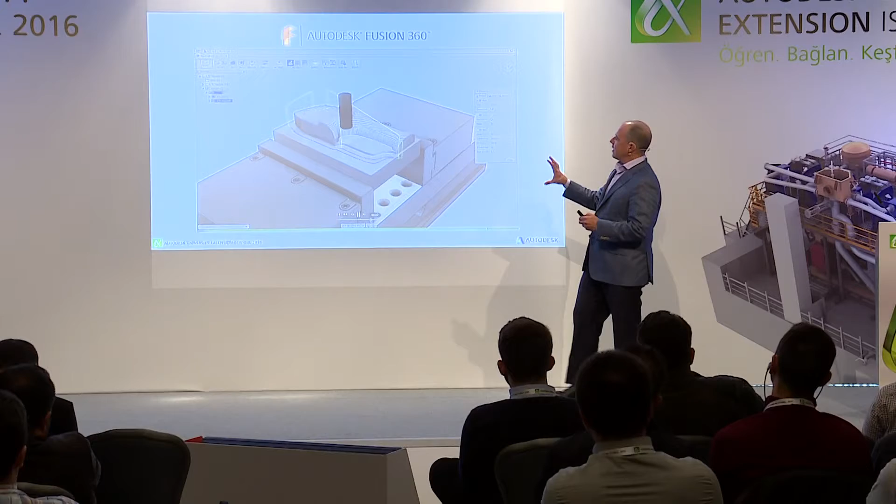So we have Fusion 360. Fusion 360 is our newer mechanical CAD tool. And it's not only a 3D modeling tool, but it's also a collaboration tool, as you can see here. It has very advanced direct modeling capabilities. It can also generate documentation, of course. But interestingly, it also has finite element analysis, and it also has the capability to generate CAM, the numerical control instructions. And it also has 3D printing capabilities.

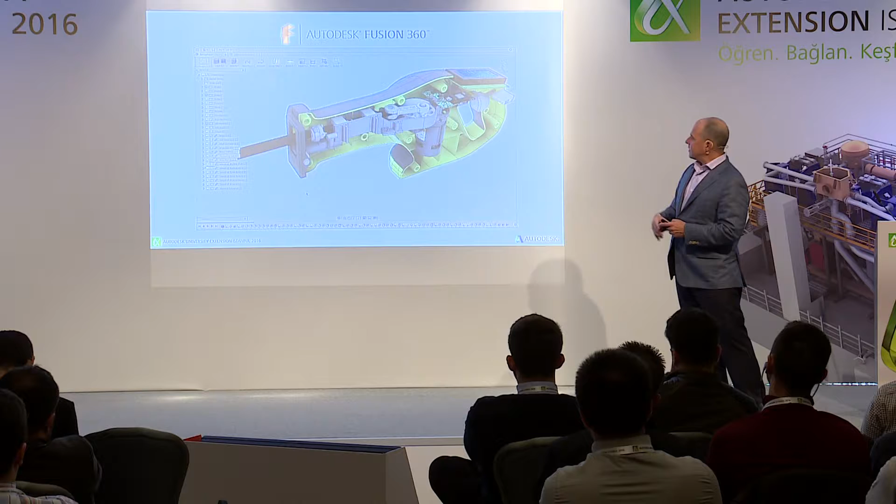So as you can see, it's not really just a CAD tool. It's a CAD tool, it's a computer-aided manufacturing tool, it's an analysis tool, and it's a collaboration tool. So we call it not just a mechanical CAD, but rather a product innovation platform.

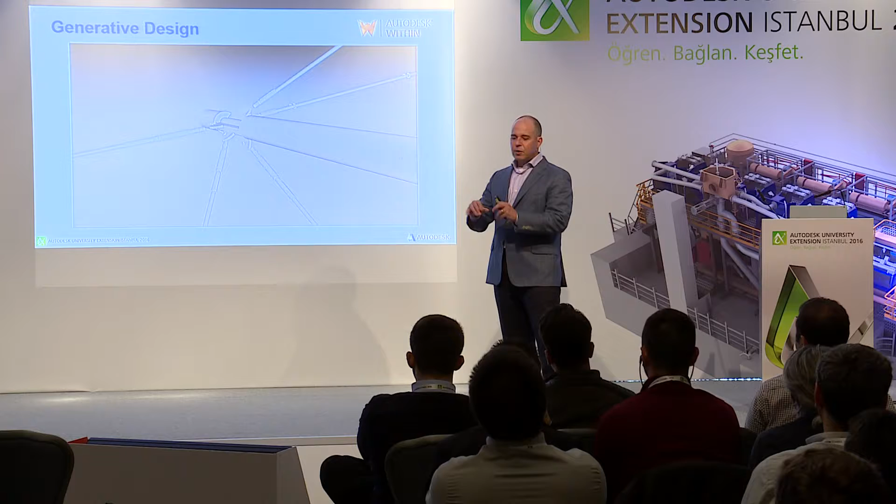The other interesting thing: this morning, both Callan and myself mentioned generative design several times. Well, we actually have a product today that does generative design. There are several types of generative design. This one is called lattice optimization. And, oops.

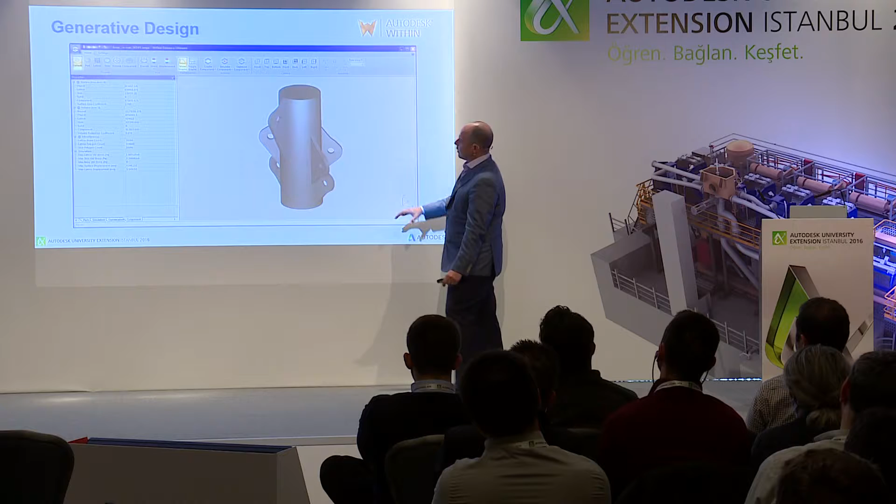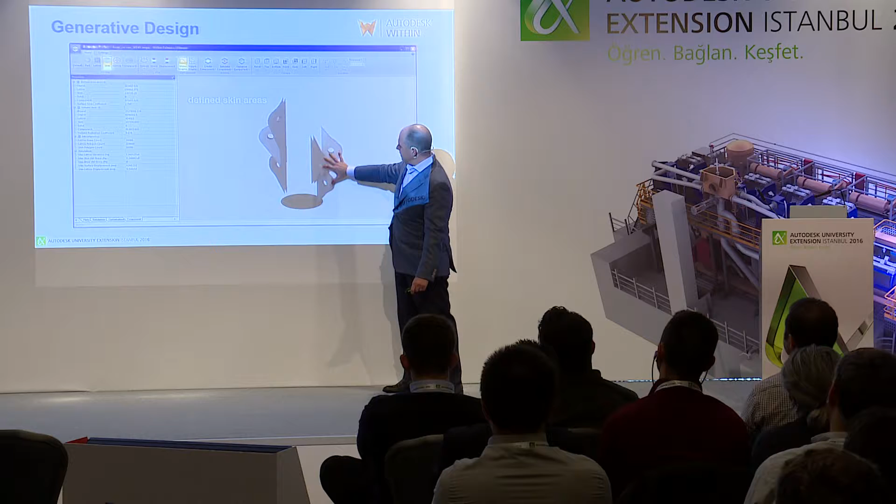And say, for example, that you want to optimize this joint here. This is the original joint, and you want to use generative design to optimize that particular part. So you bring it into the product that is called Autodesk Within. You define the geometrical connections and the boundary conditions.

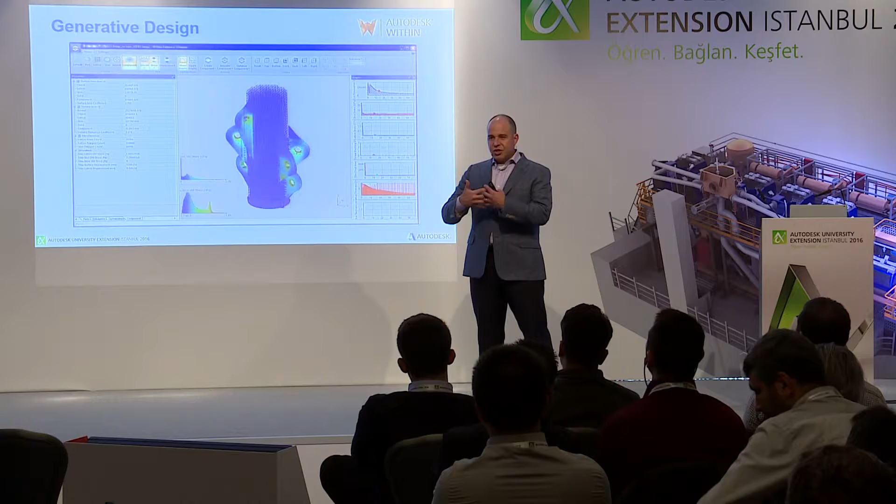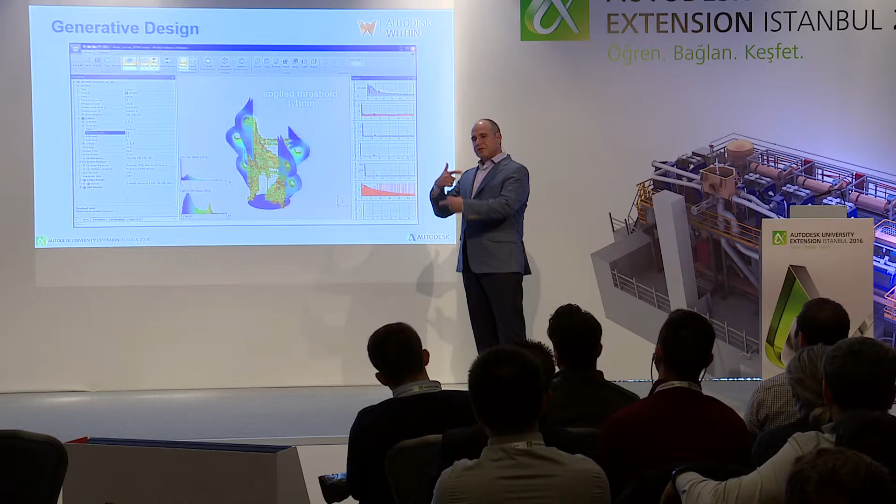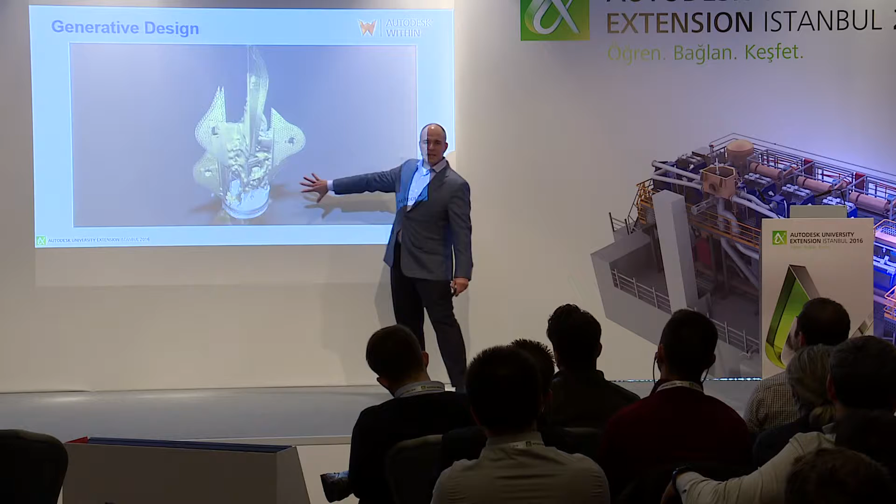And then Autodesk Within will actually change the shape. It will create these little lattices of product to have the least amount of product possible and still be strong enough to support the loads. So now it's running successive analysis and optimization, one after the other. And this is the final geometry of that same part. It applies a skin, and this particular part can be 3D printed.

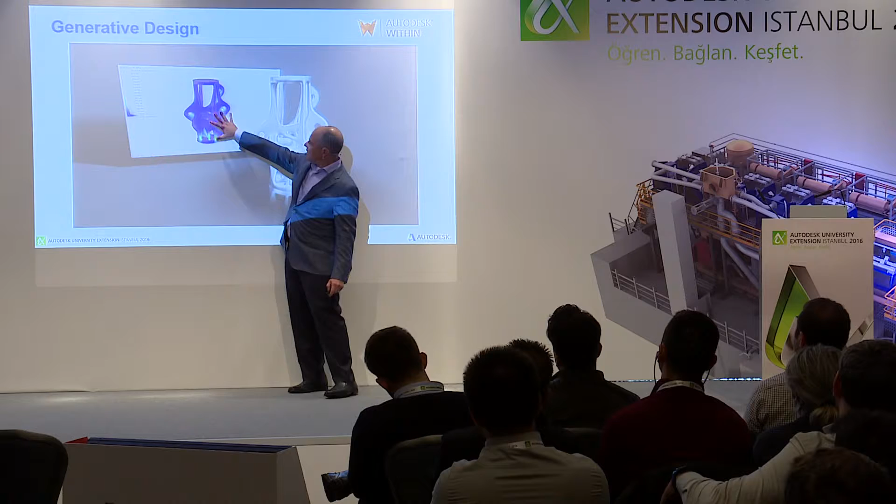And as you can see, the result is that the stresses here shown in blue are fairly consistent. You don't see red spots; it's fairly homogeneous, which means that the shape has been optimized in such a way that the stresses are uniform everywhere. And this shape is very organic and very interesting, and it's the lightest possible one that you can get. So that's using our product called Autodesk Within, our current generative design product.

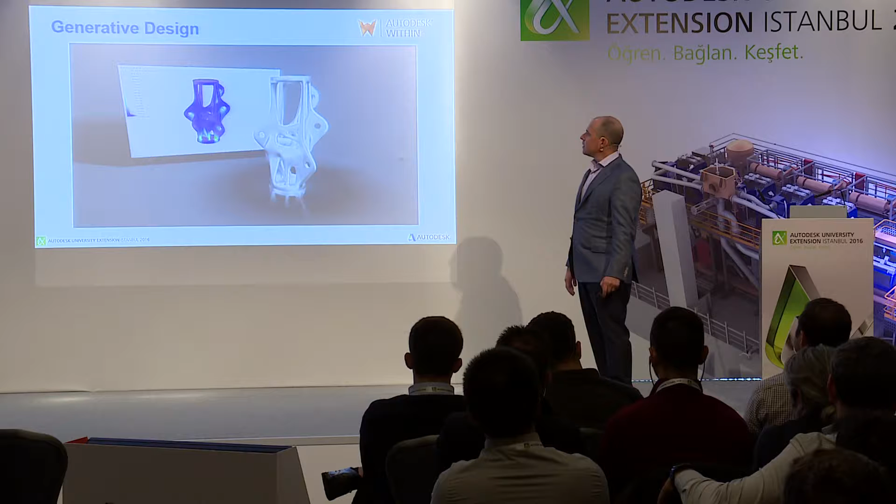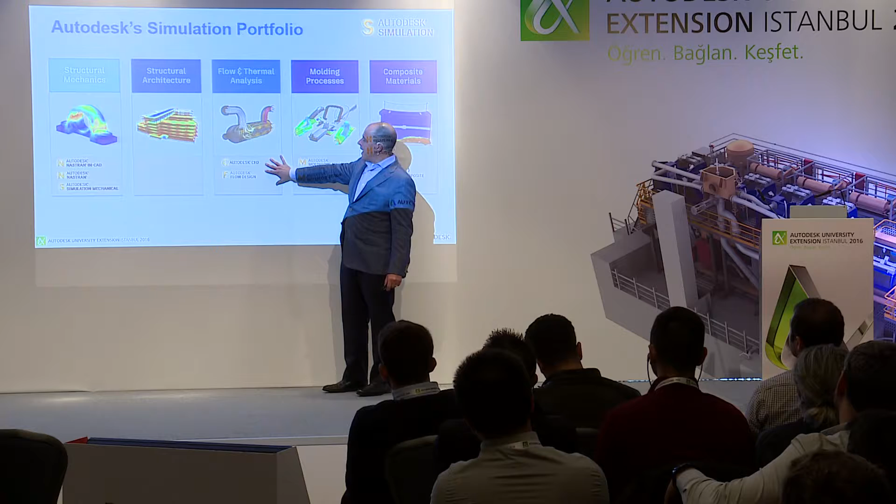Also, like I mentioned, over the years, we've been making acquisitions and development to really strengthen our simulation portfolio. So the result is that now we have a very broad simulation portfolio that includes capabilities to do structural finite element analysis, also for architecture and steel frames, computational fluid dynamics and flow design, and Moldflow, which is to analyze the injection molding fabrication.

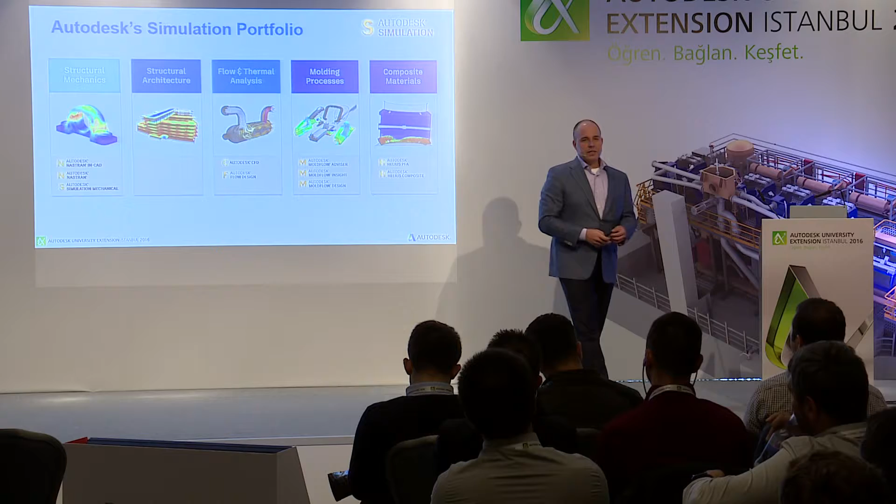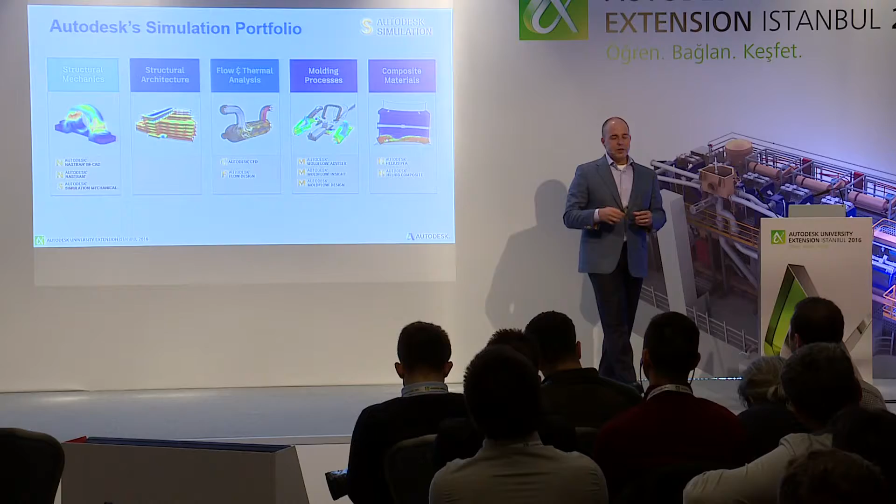And we are also very strong, probably the leaders in the market in composite materials, both the simulation and the actual fabrication of composites. So as you can see, that's a very broad and very strong simulation portfolio. And some of these tools can also be executed in the cloud, so you don't need to have a very powerful machine to run them.

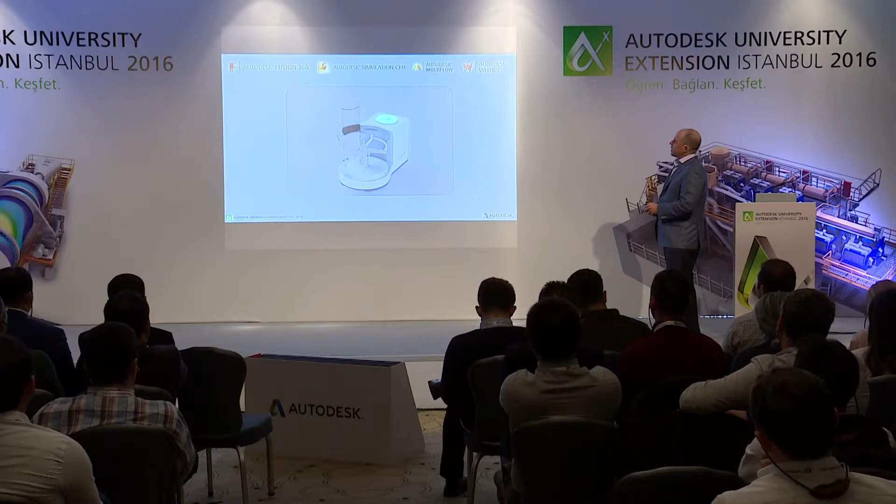So let me give you an example of the type of things that you can do today by combining a few of our products. This is Fusion 360 for the 3D modeling, simulation, computational fluid dynamics for the fluid flow, Moldflow for the injection molding, and Within for the generative design. So the purpose of this example is to design a mold for this part of the mixer. So this is the original mold. That's the original shape of the mold.

But as you can see, by analyzing it with Moldflow, the distribution of temperatures is very heterogeneous. So there are very hot spots and cold spots. So how can we redesign that particular mold to make it more efficient, both thermally and in the weight of the mold? So using Moldflow, we can analyze exactly the cooling behavior of the cooling channels and come up with a shape that takes advantage of the cooling.

And then by running Autodesk Within, we can generate a lattice that makes the geometry even more efficient. So this was the old design, and this is the new design. As you can see, it's much lighter, it's much smaller, and the result of this analysis is not only a 45% reduction in weight, but more importantly, a 10% reduction in cycle time. The cycle time is basically the time it takes to make each part, and that's very important because that increases the capacity of your injection molding operation.

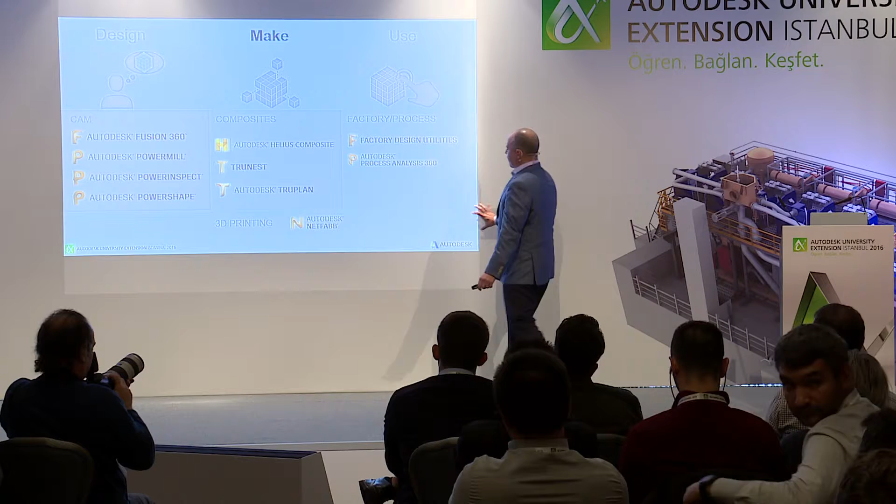A couple of years ago, we acquired a company called Delcam that brought a lot of the computer-aided manufacturing capabilities to Autodesk, and they have a product called PowerMill that now is part of our CAM products. We're also very strong in design and fabrication of composites, and we also have tools to design the factory in which these things are going to be manufactured. And probably the latest addition to our portfolio is Netfabb, which provides advanced 3D printing simulation capabilities. And I'll show you a video of Netfabb.

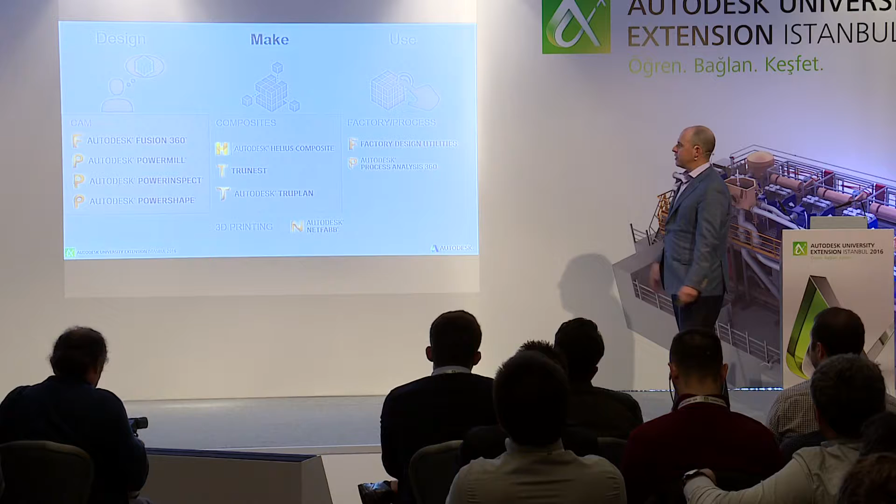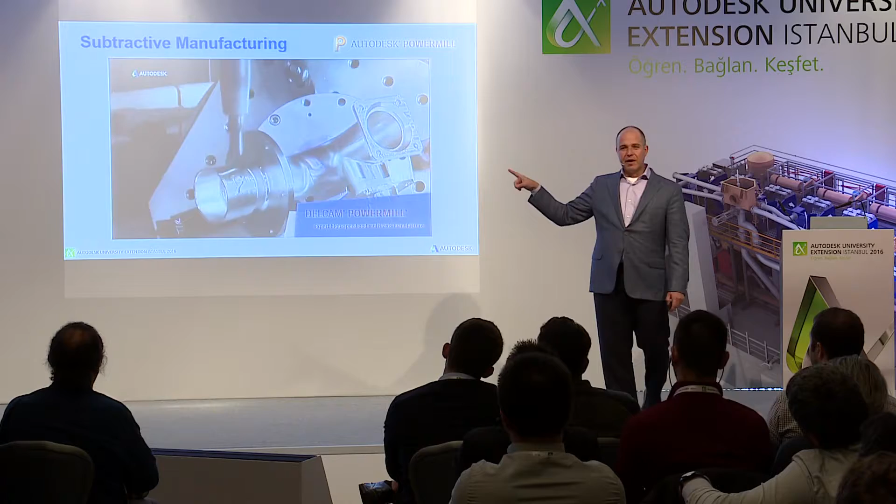So this is a little video of the type of stuff that you can do with PowerMill. With PowerMill, you can generate 3, 4, and 5 axis CAM. The type of operation that you see in this is a 5-axis manufacturing operation. You can generate instructions with PowerMill. So this is the type.

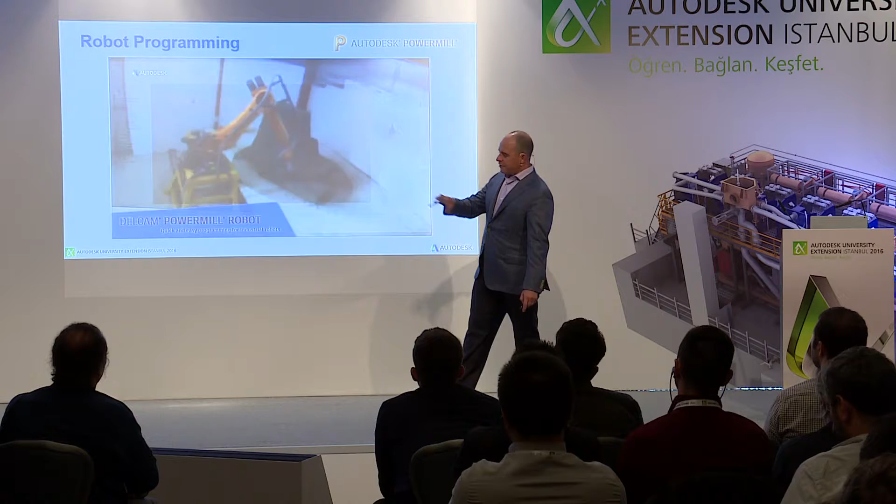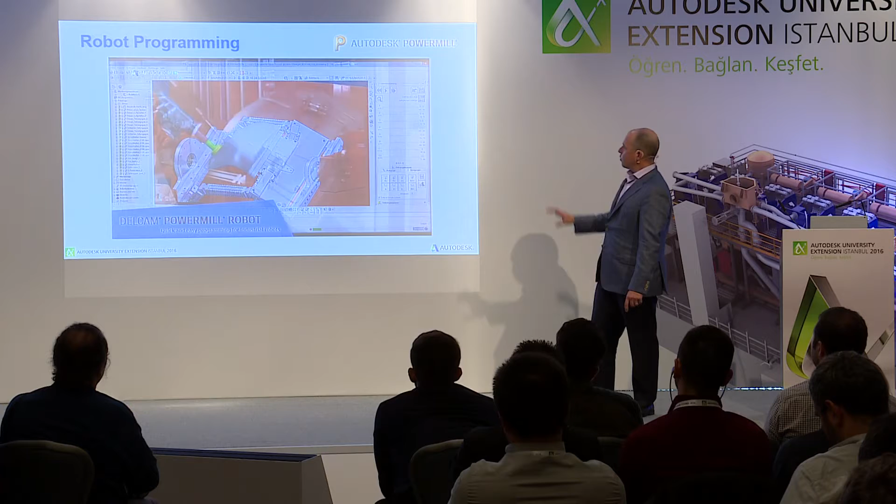PowerMill, even before it was acquired by Autodesk, was the top CAM tool for molds and for complex geometries. Also with PowerMill, you can do robot programming. So not only for pick and place operations, but to actually do subtractive and additive manufacturing, as you can see in this video. So with PowerMill, you can generate the instructions for robots like this.

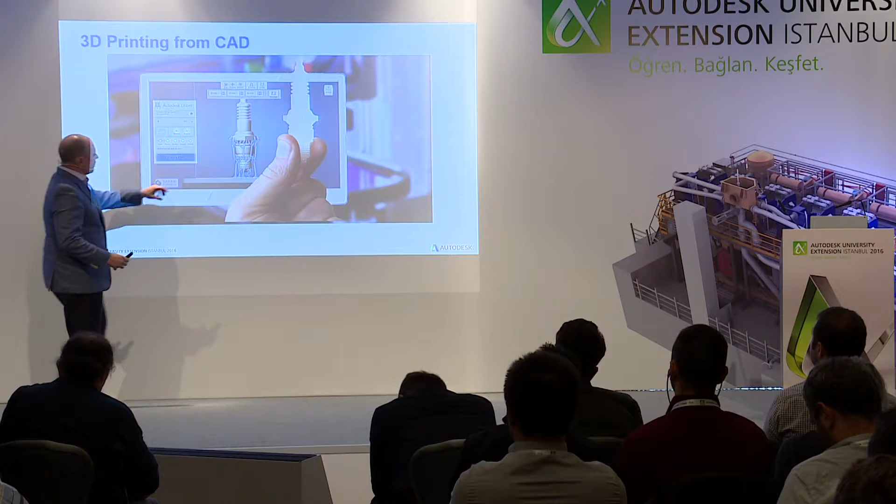And we have very strong 3D printing capabilities. We started from the beginning of the 3D printing movement, and all of our mechanical modeling tools have the ability to print to a 3D printer. This particular example is the tool that you see when you send something to 3D print. It allows you to optimize the orientation, to set up the supporting structures, and to actually send the job to a 3D printer or a specific manufacturer.

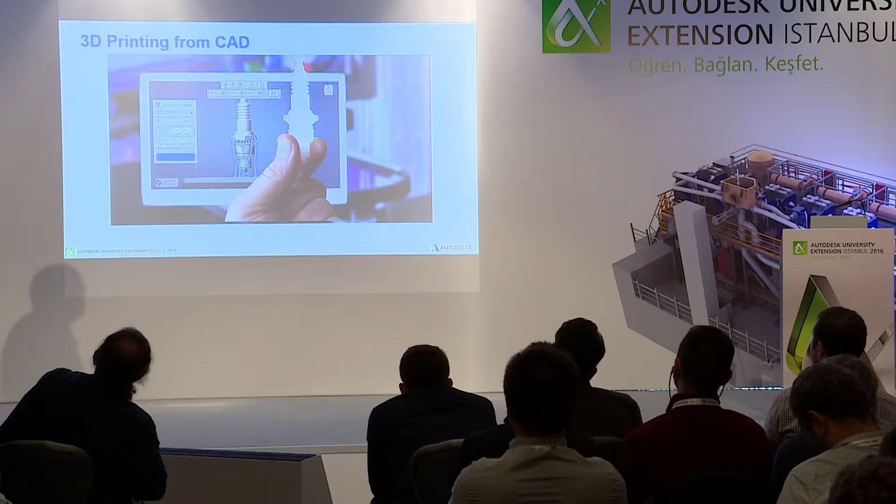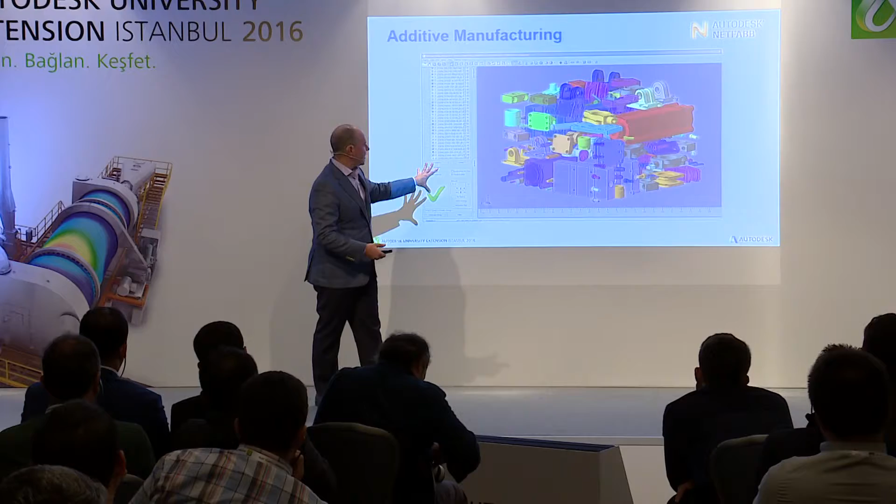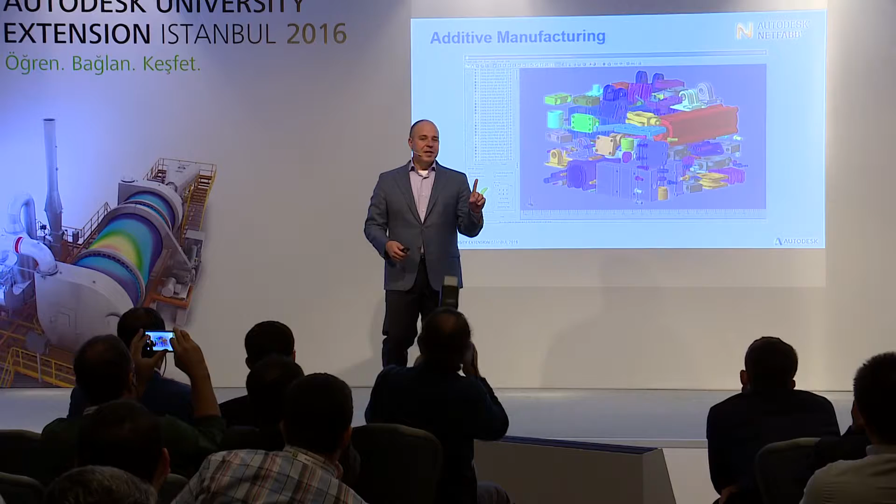And Netfabb is kind of the top tool to prepare and optimize jobs for 3D printing. So you can do very sophisticated things like this. This is an optimization of all these parts that can be printed in one 3D printing pass. So you are optimizing the use of the 3D printing volume to the very max with Netfabb.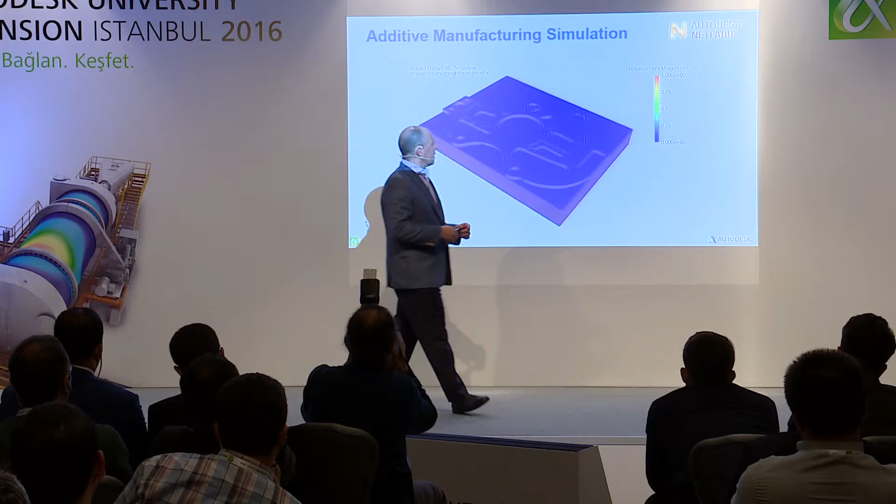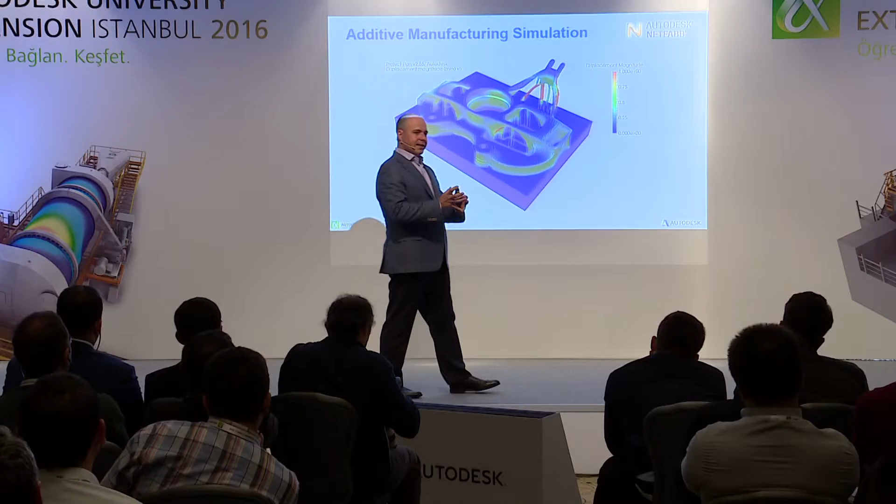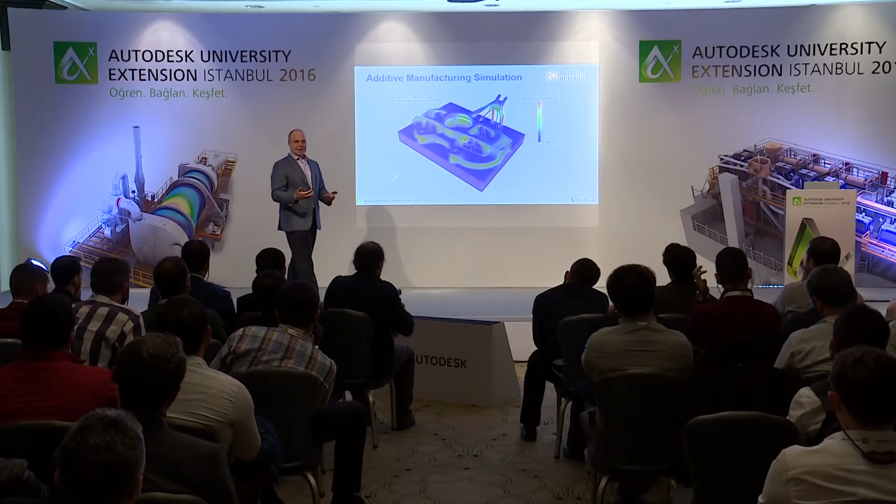Netfabb also allows you to simulate the stresses that occur during 3D printing. That is a big problem in commercial 3D printing, because when the material cools down, it creates residual stresses that are very difficult to predict and to control. The way manufacturers have been doing this, they've been just printing and printing and testing until they got the right geometry. Now with Netfabb, they can at least predict where the stresses are going to be, and that significantly reduces the amount of prototypes that you need to 3D print.

Like I mentioned, we're also strong in manufacturing of composites. We have this tool called TruPlan that allows you to send the instructions to this tool that basically lays the fibers of the composite structures. And we're also building integrations with manufacturing as a service. That's what MaaS stands for, manufacturing as a service. So this particular screenshot illustrates the following.

You have this shape inside Fusion 360, our mechanical CAD tool, and you want to send it to a manufacturing as a service to have it 3D printed or machined or injection molded. For example, Protolabs is a service that 3D prints parts for customers. They also machine, they also injection mold. So I'm here, I click the make button, I send it to Protolabs, and then they ship it to you. So it's like a print button, but you don't have to have any manufacturing equipment. They'll take care of that for you. We are starting to have those integrations with this type of service.

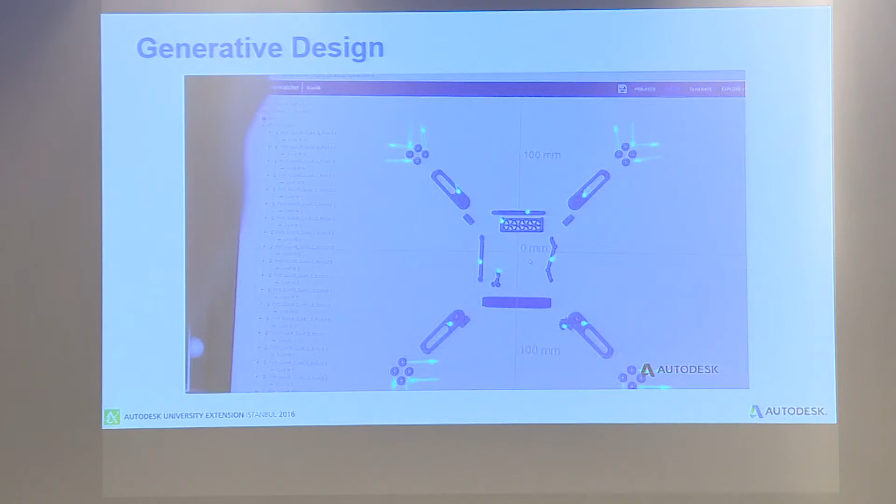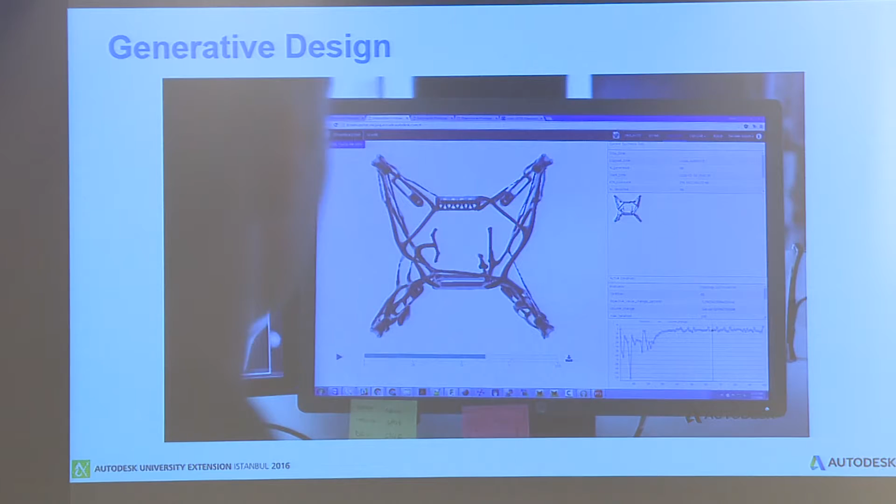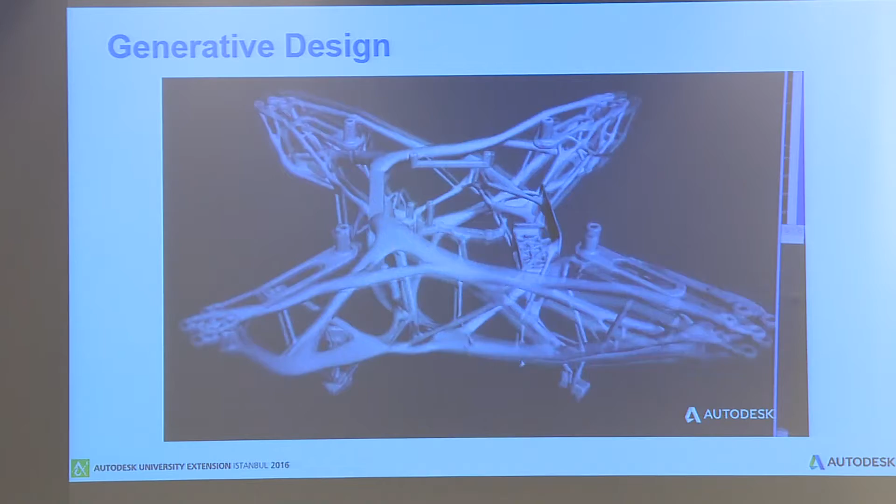What if you could come up with thousands of options for a single design without drawing, all of which meet specific goals set by the designer? So those are all the options generated. Pick the one design that delivers on the most important criteria, the design you couldn't possibly have imagined. This is generative design, a technology that harnesses massive computing power, creating forms with precise amounts of material only where needed, achieving maximum performance while wasting nothing.

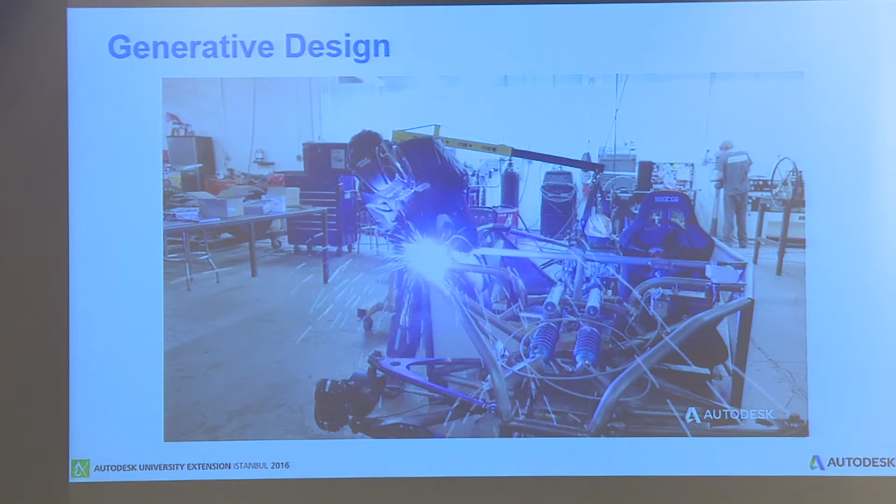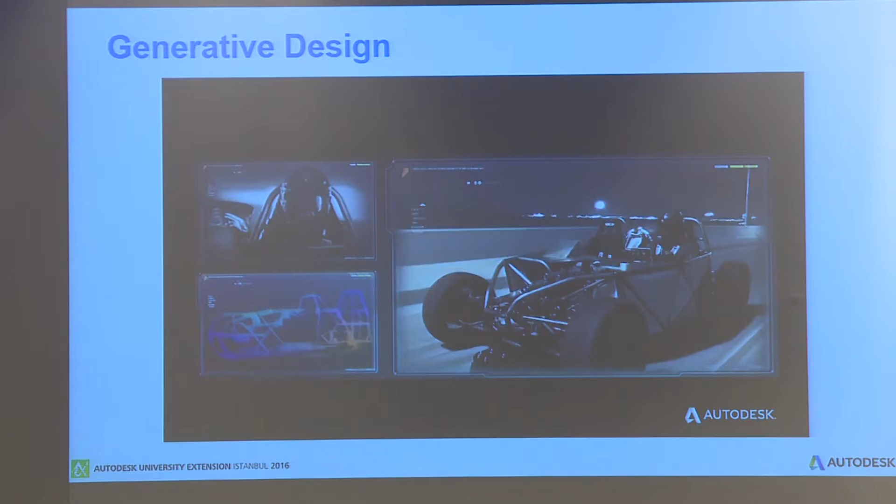But generative design can be about much more than simply turning out alternatives. Prototypes can be scanned and equipped with sensors that provide real-time performance data that can be looped back into the design process, so the object, in effect, co-designs itself. And depending on the material and method of manufacture chosen, the software can optimize the design for those choices.

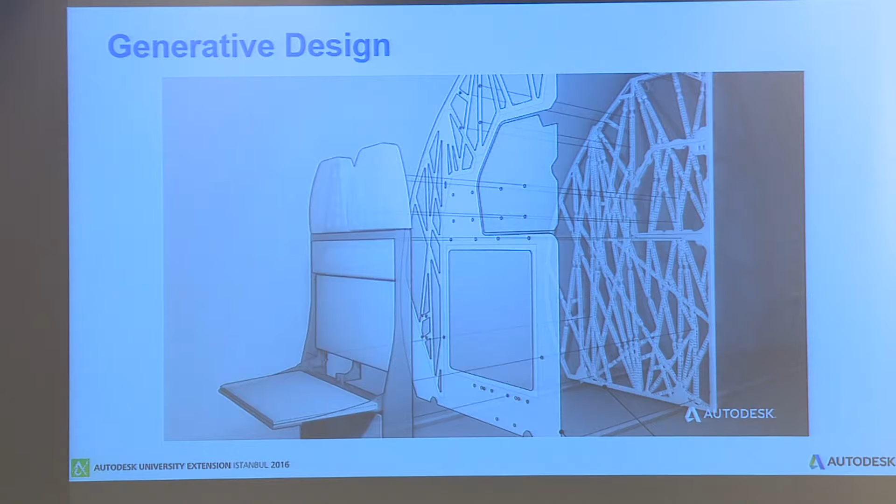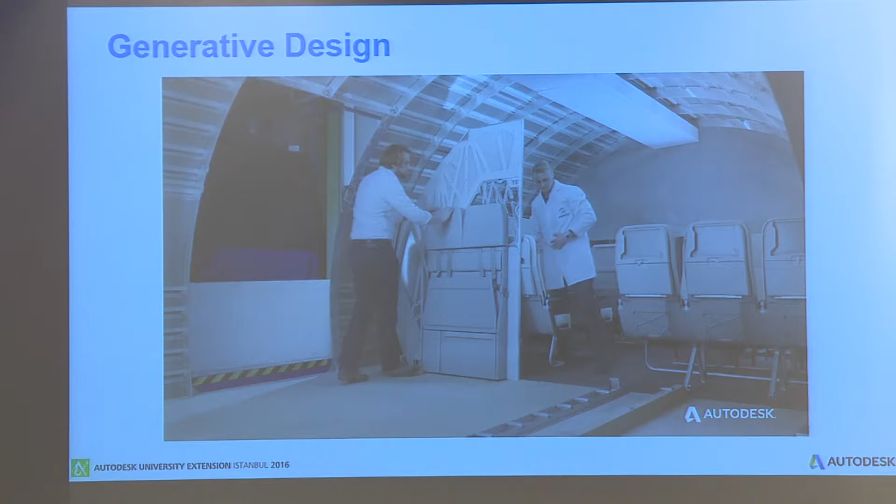In its search for the optimal design, generative design creates complex forms that would otherwise be impossible to make using traditional manufacturing methods. Now with advancements in material science and the ability of 3D printers to print metal, companies like Airbus can create forms like this airplane partition panel that's half as light and just as strong. The result? Significant reduction in fuel costs and CO2 emissions.

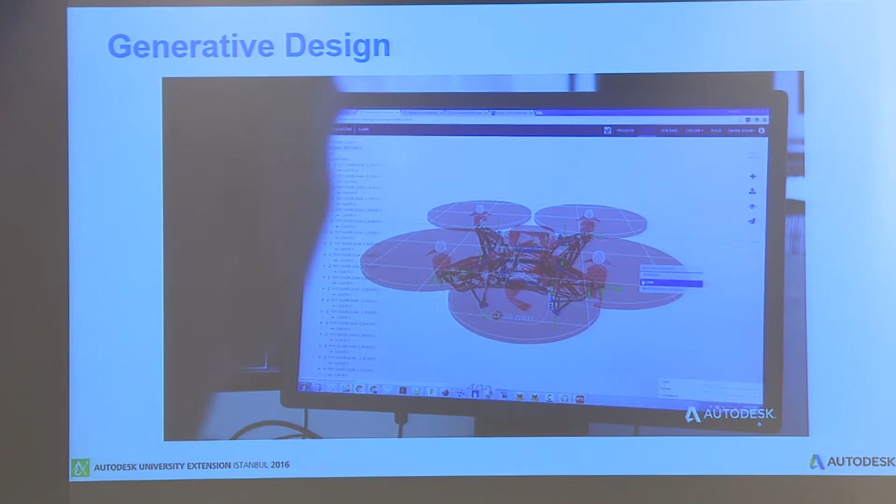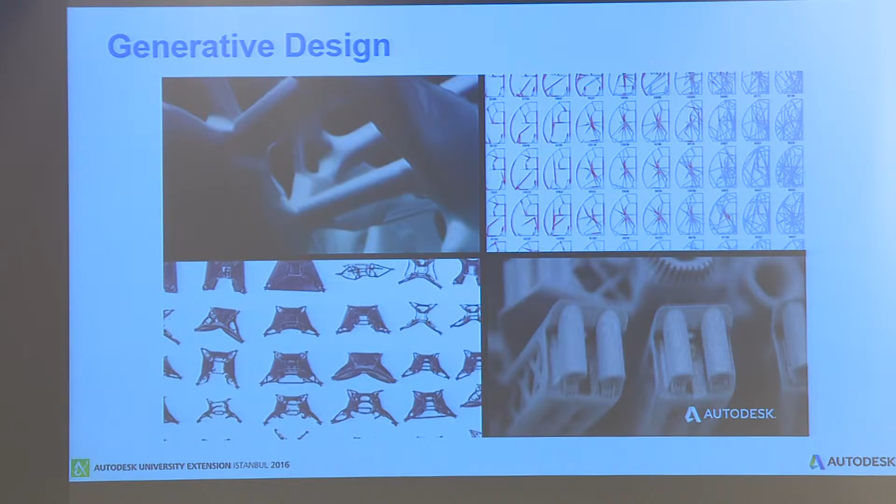The things that have limited us in the past, software, materials, manufacturing, no longer do so. With generative design, the world can look and perform any way we want it to. This is the next stage in the evolution of design, and it's happening now.

So that's what's coming under generative design. And as you probably have figured out by now, generative design is actually something really strategic for us that we consider very important. We truly believe that generative design is going to impact the way that we do design, because instead of us actually creating the shape for a product, we tell the computer what the constraints and the design goals are, and the computer generates the shape for you.

Or in this case, we give it the design parameters, and the computer generates thousands of options, and it helps you choose the right one. So what we like to say about generative design is moving from using the computer as a tool to using the computer as a collaborator. And we really think it's going to change the shape of design. So we're very aggressive in generative design.

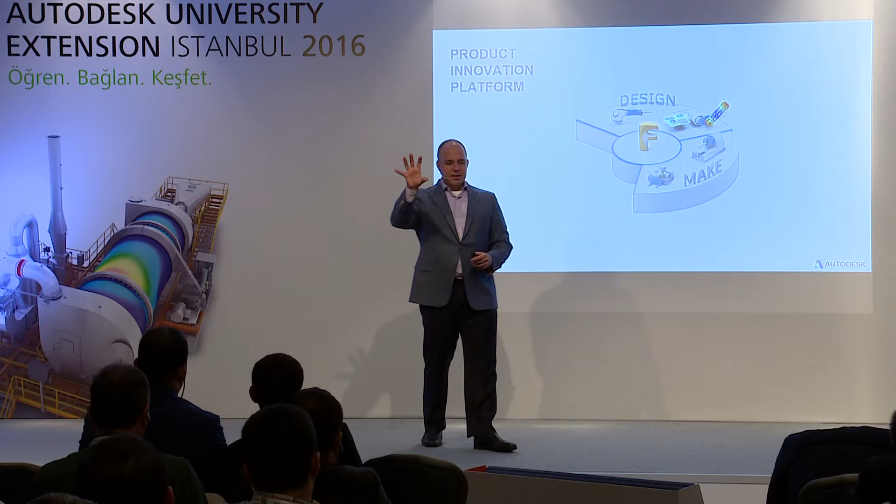Something that we're also doing is that we are kind of re-architecting our capabilities from all of our products into what we're calling a single product innovation platform. So in this product innovation platform, which is going to be called Fusion, we have Fusion at the center with all the data about the products. And then we have the design capabilities, the manufacturing capabilities and the IoT capabilities around that data center.

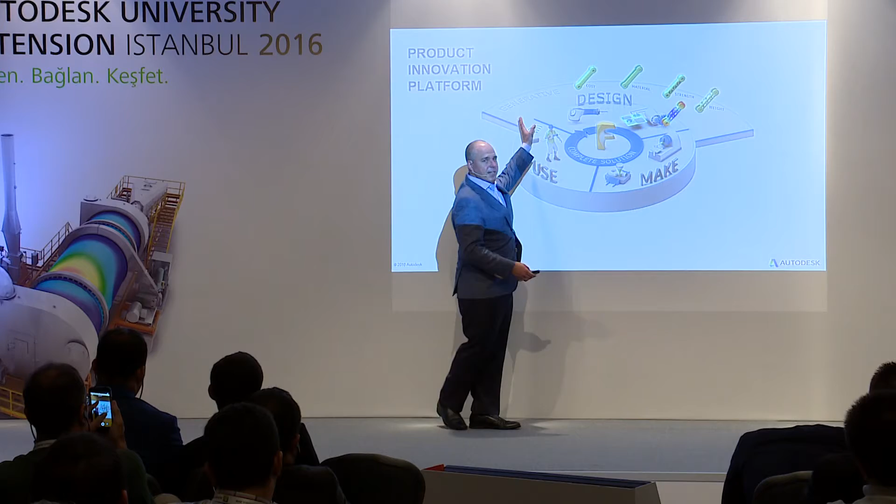So for example, our generative design capabilities will be in the design group. Our 3D printing and CAM capabilities will be here. And then our connectivity, our IoT capabilities will be around the use area. So this is just a very conceptual diagram, but we are reconsidering and re-architecting our products and our capabilities to kind of deliver in this form of a platform.

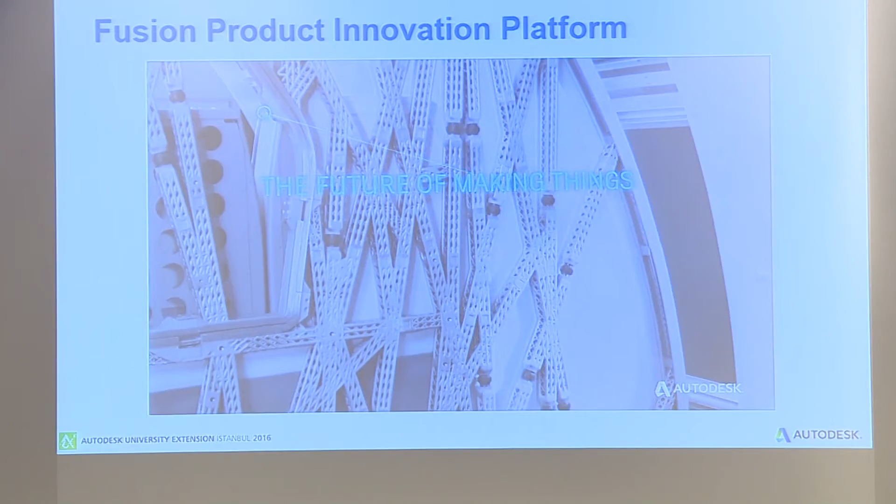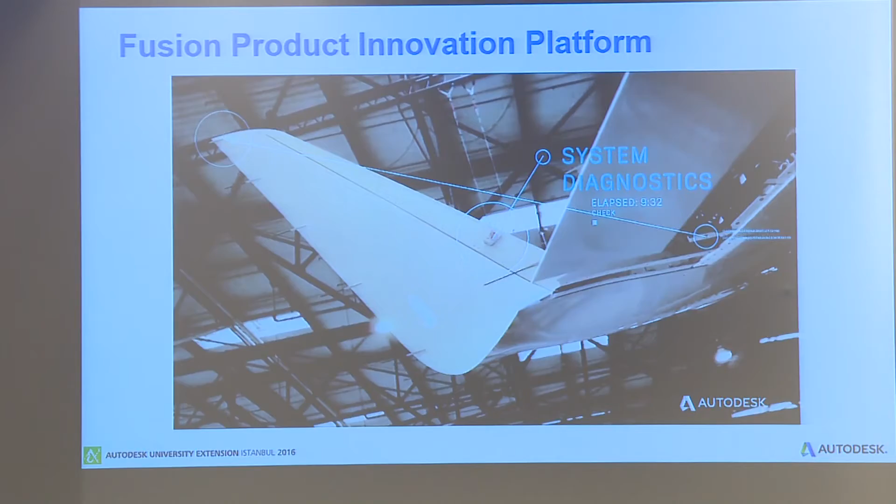We're entering a new era of manufacturing, an era of massive change and disruption, an era in which you've got to evolve to stay competitive, where the key to success is innovation. Today, the future of making things is forcing product designers, developers, and manufacturers to rethink the way they design, make, and monitor products. Why? Because consumers expect smarter, connected, and more personalized products than ever before. Autodesk is embracing this new era of manufacturing and creating the solutions you need to stay competitive. Introducing Fusion, a cloud-connected product innovation platform. It's not just a CAD or CAM tool, not just a PLM or IoT tool. It's all of these and more.

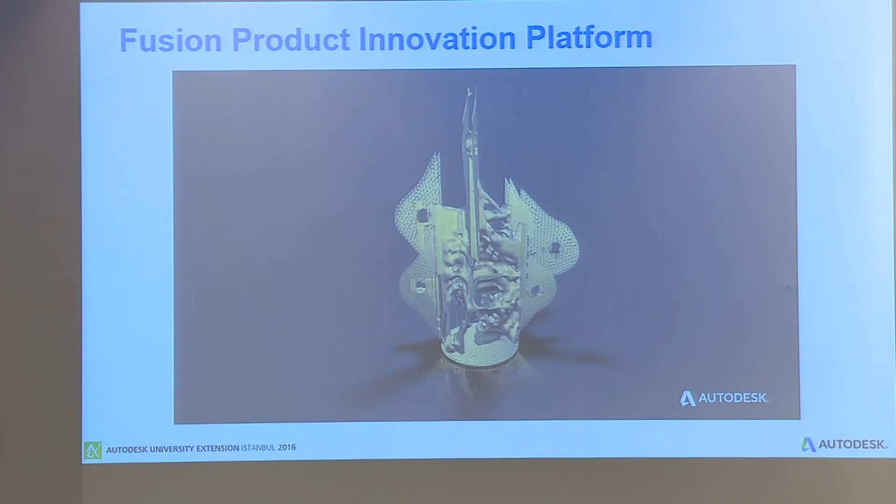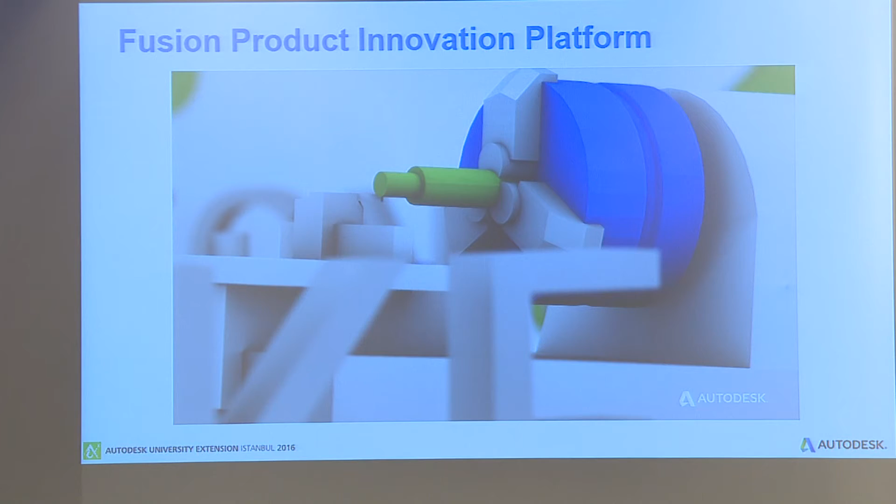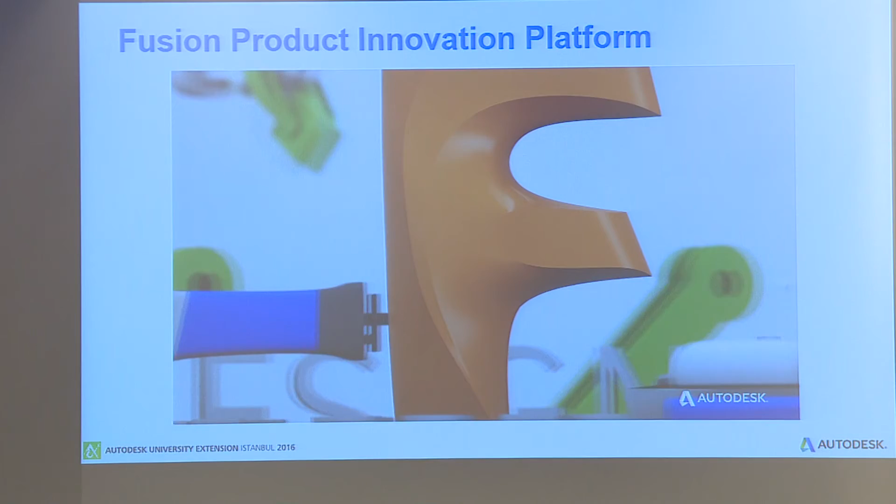It's a true SaaS product development platform that allows you to rapidly create generatively designed products, metal 3D printed products, products connected to the world around you. Fusion brings together a set of apps that helps you design the products of the future that are optimized to perform as great as they look. That helps you make products using advanced manufacturing techniques to achieve higher quality and lower costs. That helps you understand how customers use products, gathering real-world data and closing the loop to inform future innovations and shorten the development cycle. Fusion was designed to run entirely in the cloud. There's no hardware to buy and maintain, no costly upgrades, and your data is accessible anytime, anywhere.

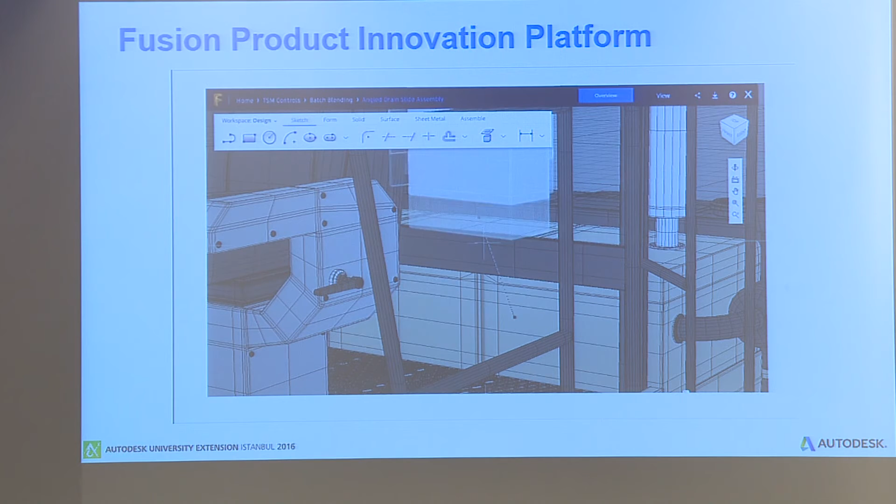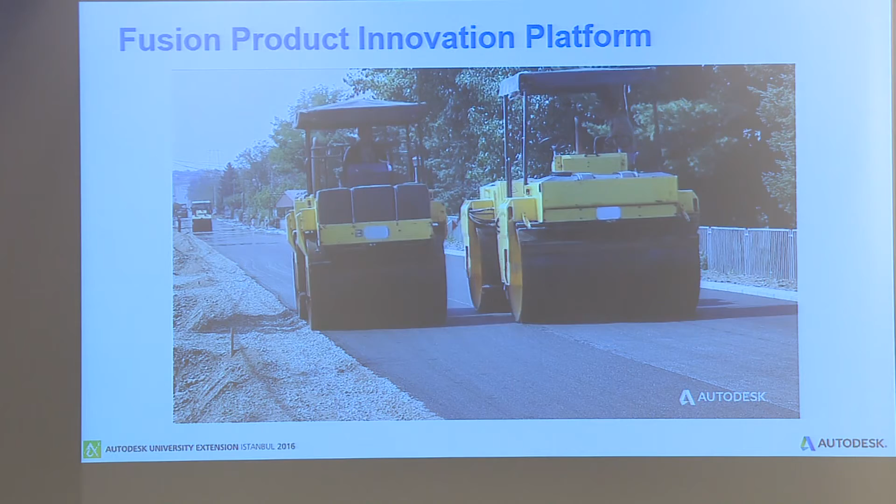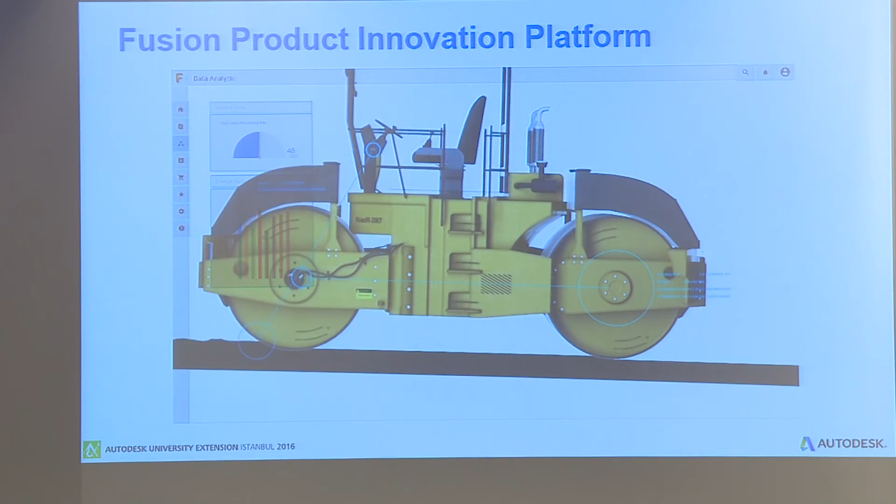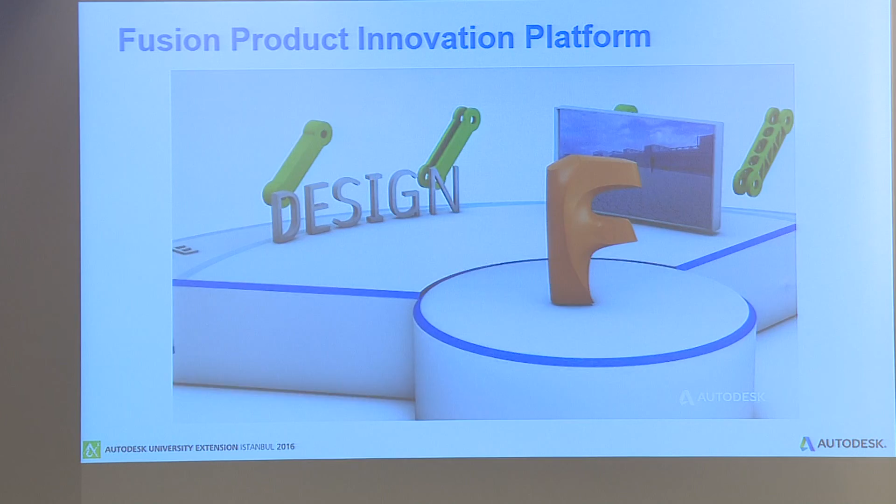With Fusion, industrial machinery manufacturers can evolve product lines to incorporate IoT, creating new revenue opportunities and service capabilities. These new product lines include sensors and electronics that collect real-world data. Data that is based on usage performance that feeds new features, functionality, maintenance, and product optimization. With Fusion, you can detect patterns, make isolated or full-scale adjustments to save time and money for you and your customers. You can make more informed decisions based on real-world metrics collected from your products. With Fusion, you can achieve competitive separation by leveraging operating data from your products in the field, gaining insight to provide higher levels of service, customization, and design optimization. Get ready for the future of making things. Innovation starts today with Fusion by Autodesk.

So obviously this is a marketing video, so everything is kind of mocked up and it's not real, but it does show our strategy towards manufacturing and how we want to integrate this, and we're actually working on that right now.

So that's the last slide. Hopefully what I was able to convey today is kind of our view of where the manufacturing industry is going, our picture of the future of making things, and hopefully I gave you a very high-level idea of the products that we have today and the products that we are developing to take you to this future of making things.